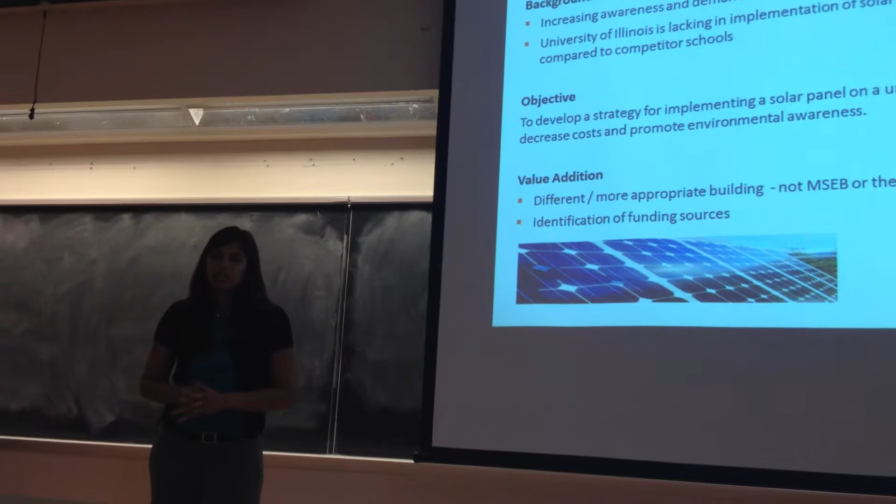So that brings us to the objective of our project, which is to design and develop a system, a solar panel for a university building to help decrease costs and, more importantly, to increase environmental awareness. This project has been repeated in past years. So in order to add value, we are choosing a more appropriate building for this year. In the past, there's MSEB that was done in the ARC, but this year we're doing a more appropriate building.

And also we're identifying funding sources because of the expense of solar panels. We're trying to make this an actual feasible project so we can submit a proposal to the university.

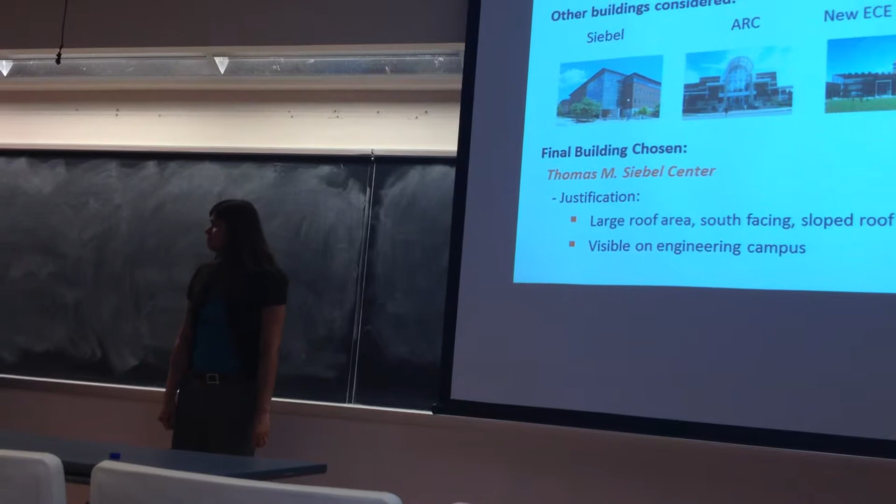I'll discuss the building analysis briefly. So the initial proposal was for us to investigate the MSEB, but in further review we decided that it was not one of the most appropriate buildings due to area constraints on the south roof. So we investigated the Siebel Center, the ARC, the new ECE building, which is currently being constructed, as well as the Speech and Hearing Science building.

Ultimately, we decided on the Siebel Center due to its large south-facing roof area that is also sloped at an appropriate angle for our latitude, so there's a maximum light absorption. And it's also visible on the engineering campus, which helps promote green energy.

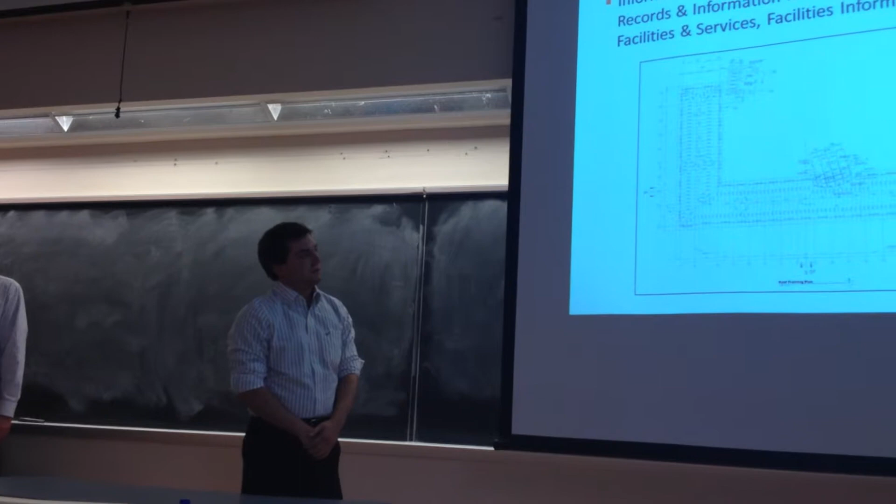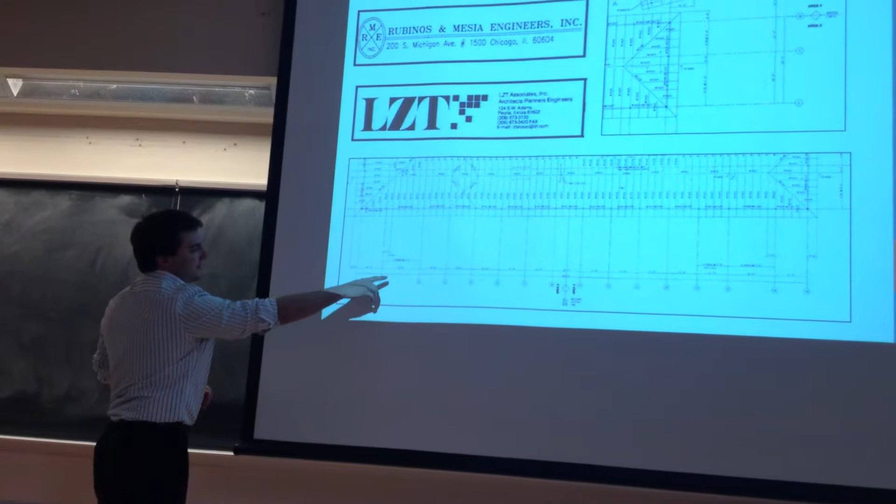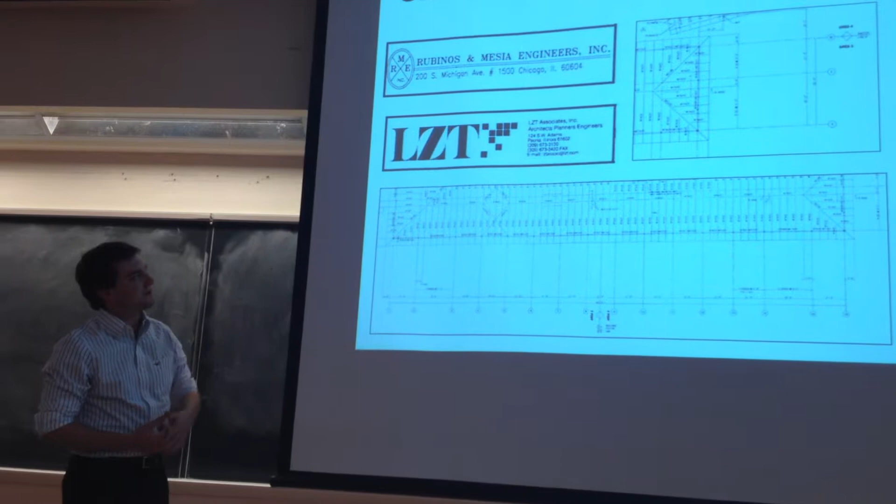As you can see here, this is an architectural drawing of the Siebel Center that we acquired courtesy of Beth Leitz at Facilities and Services. And zooming in closer on the next slide, you can see the very bottom of the south-facing roof, and there are distances and lengths that you can see there, as well as the far east side of the roof and the lengths there that were used to calculate. And these designs are courtesy of these architectural and engineering companies.

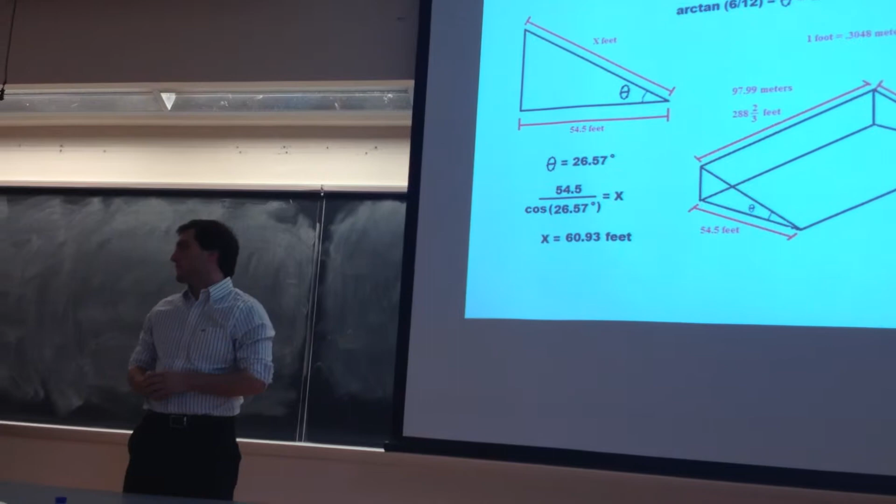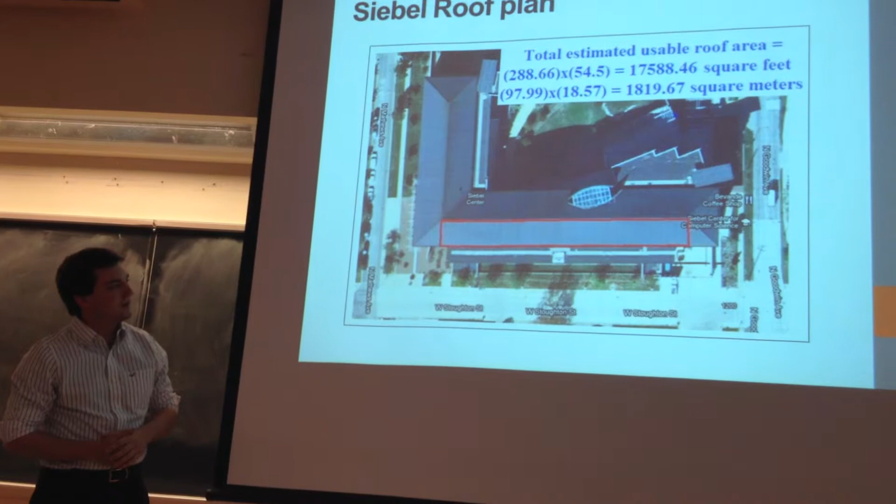And on the next slide, I've created a schematic that shows the slope of the roof, which ended up being 26.57 degrees. The length ended up being just under 98 meters, and the width was just over 18.5 meters. Using these lengths and widths, we were able to calculate a maximum possible roof area of just over 1,800 square meters. And as you can see on this Google image, this is the area of the Siebel Center roof, which we were planning on implementing the solar array.

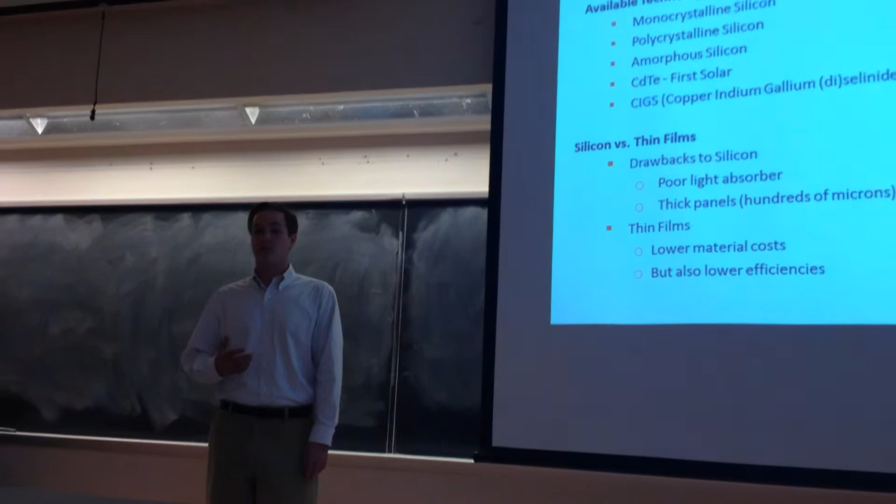So I'll be talking about the different solar technologies that we looked at for this project. So we looked at a few different technologies, silicon varieties, including monocrystalline silicon, polycrystalline, and amorphous, but also thin film varieties, including cadmium telluride, which is being developed primarily by First Solar, an American company, and also copper indium gallium diselenide.

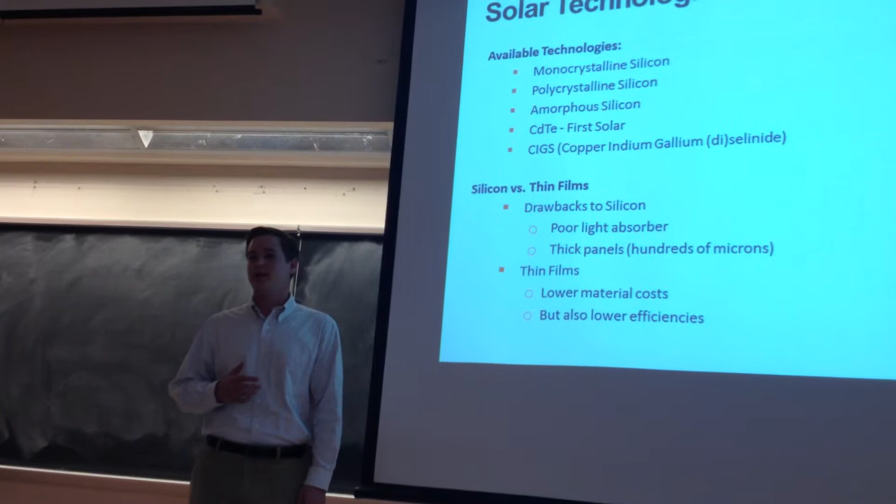So monocrystalline silicon is advantageous within the silicon varieties because it has fewer grain boundaries and is therefore more efficient. And also the electronics industry has a lot of experience with manufacturing this material because of its use in the electronics industry.

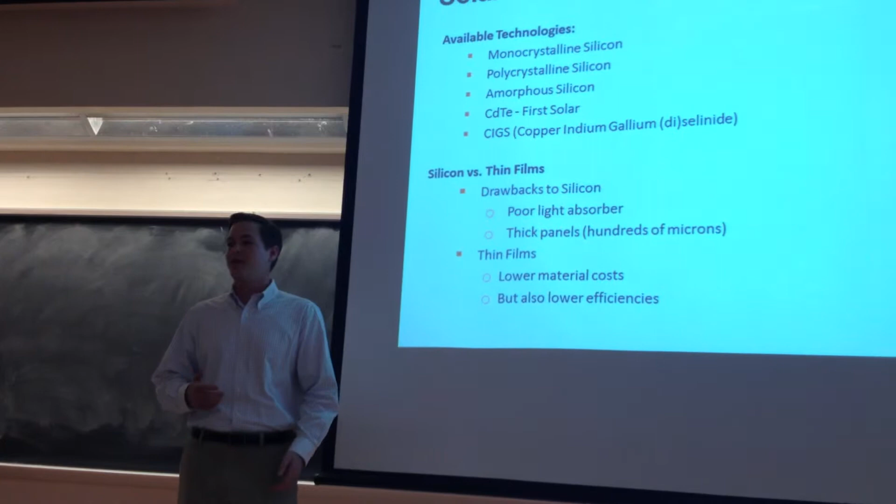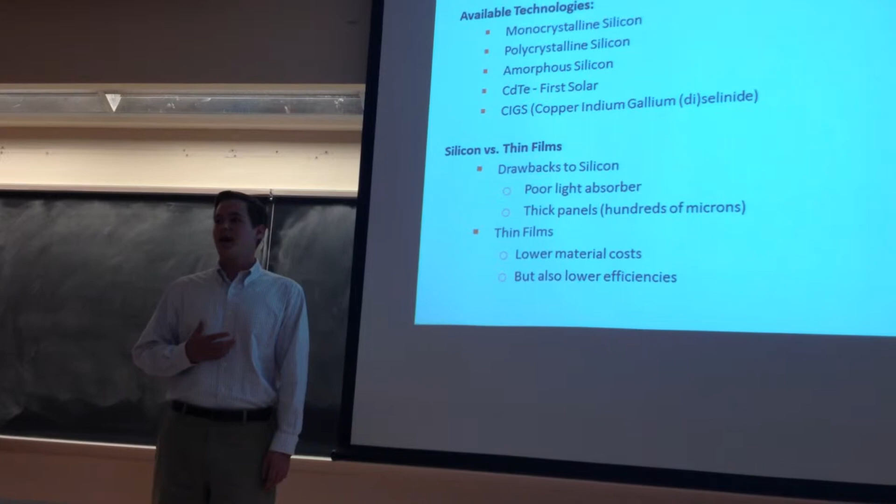Thin film solar panels have been developed primarily in the past 10 to 15 years in response to certain drawbacks with silicon. Silicon is a relatively poor absorber of light, and the panels made of silicon have to be very thick, hundreds of microns. Thin films have the promise of offering lower material costs because they're much thinner than the silicon panels. But the drawback of this is you get lower efficiencies. So this is the trade-off that researchers have been working with.

So there were a few different criteria that we examined for choosing a technology. We defined our value as being the total cost of the panel, which includes the modules themselves as well as installation costs, which are very significant. And we divided that by the first year output as a means of comparing between the different options.

We also wanted a warranty that was at least 25 years. This is a long-term project. That's a guarantee by the manufacturer that efficiencies won't drop by more than 20% over that period. And lastly, we wanted a technology that's been field tested for this period of time. As I mentioned, thin film technologies are newer, having been developed in the past 10 to 15 years, so we don't actually know how they hold up over a 25-year period.

And this is actually a risk outlined by First Solar in their annual 10K report. You can read the excerpt here, that they don't know how cadmium telluride actually holds up over 25 years because it's a newer technology. So I doubt that First Solar is losing sleep over this, but it's a risk that should be considered. And these drawbacks led us to look within the silicon technologies, and we ended up choosing monocrystalline silicon because it offered the best value.

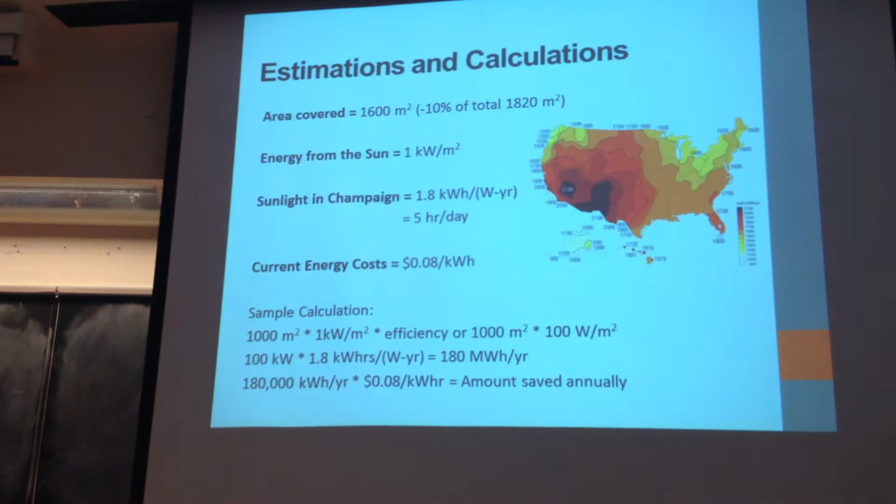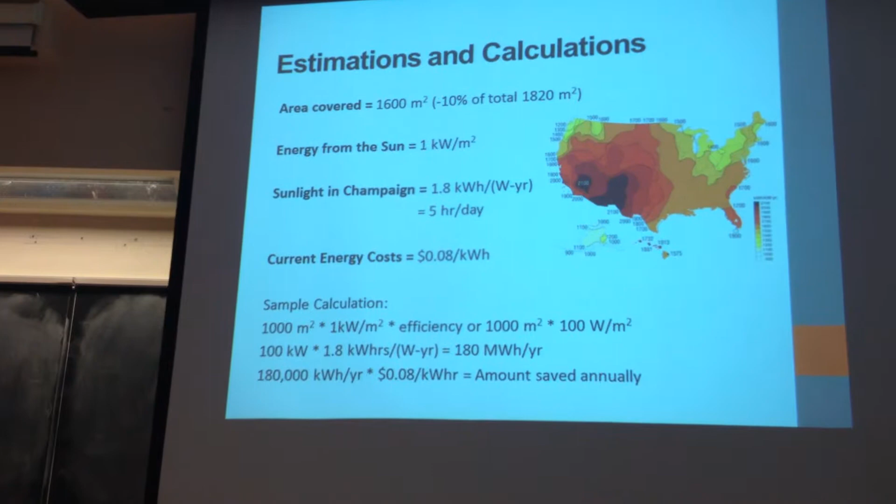And the figure on the right shows that Illinois is in the moderate range. And also, the current energy cost for Siebel is 8 cents per kilowatt-hour. It was 7 cents last year, but it has risen to 8 cents this year. And using those numbers, we can calculate how much we would save.

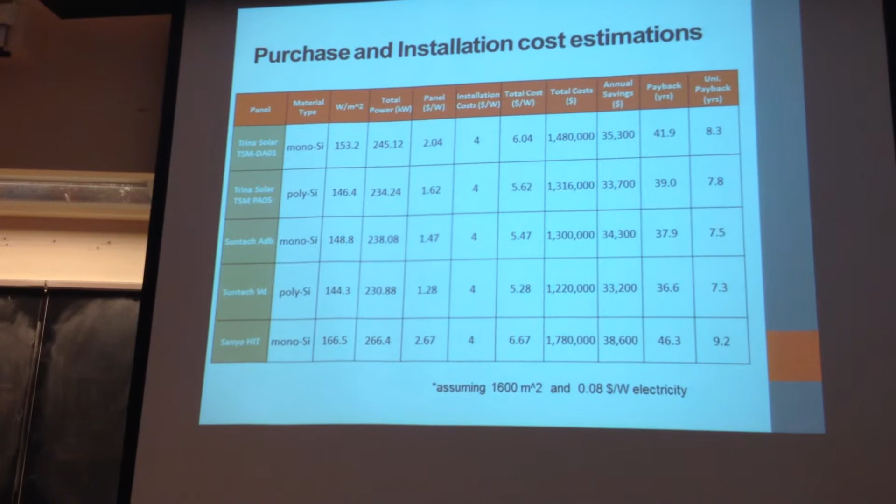So I took silicon panels from 3 different companies: Trina Solar and Suntech, which are Chinese companies, and also Sanyo. You can see the efficiency outlined in watts per meter squared, and they're all quite similar, with each company's monosilicon obviously slightly higher than the polycrystalline silicon. And this leads to a total power output of around a 250 kilowatt system.

And the installation cost is a big deal. We can't really say for sure what the installation cost would be, because the process would be going through Facilities and Services. So we talked with Professor Rockett, and he said that $4 per watt would be a pretty reasonable amount.

It could be as high as 5 or 6, but it could also be as low as like $2 per watt per kilo. So all in all, it comes out to be around $1.5 million roughly, with each panel saving around $30,000 to $35,000 a year, and a payback period ranging from around 35, 36 years all the way up to 46 for the Sanyo.

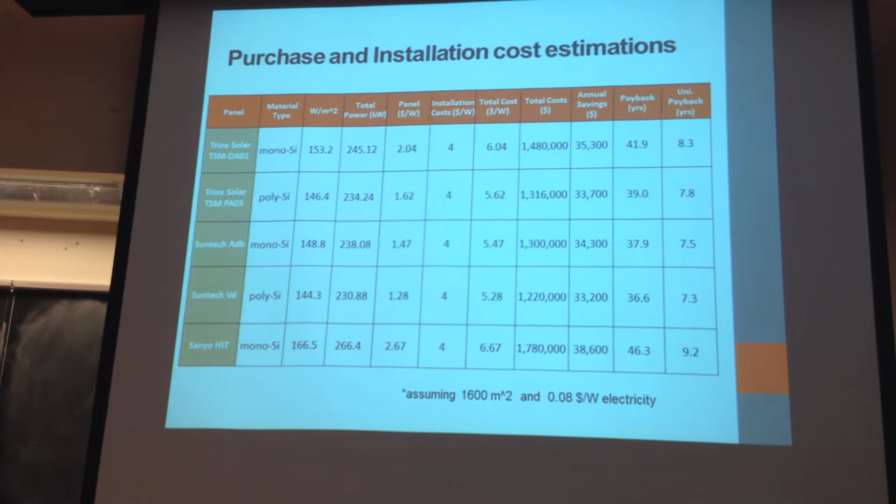However, with our funding strategy that Vijay will talk about later on, we might be able to get the university to pay only 20% of that total cost, which will lead to a shorter payback period. So within these, we recommend only the Sanyo, but in reality we wouldn't have a choice because we would be submitting the proposal, and the F&S people would actually be doing the bids, and they would be the ones selecting.

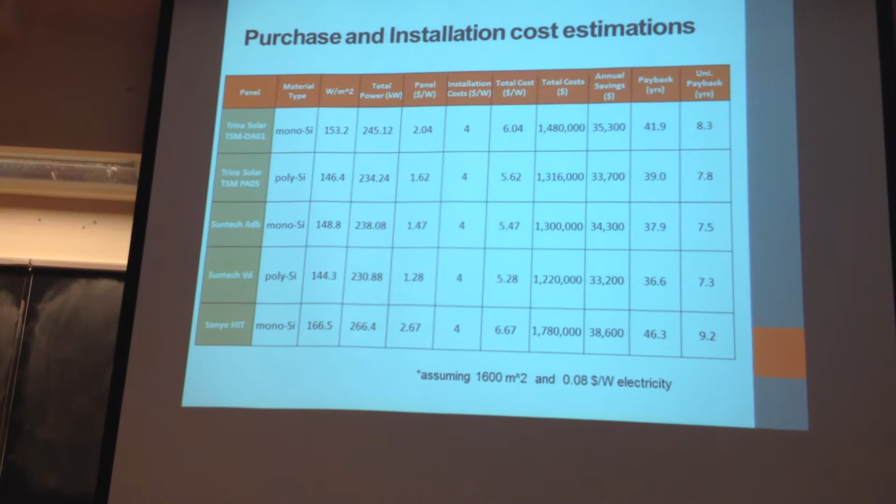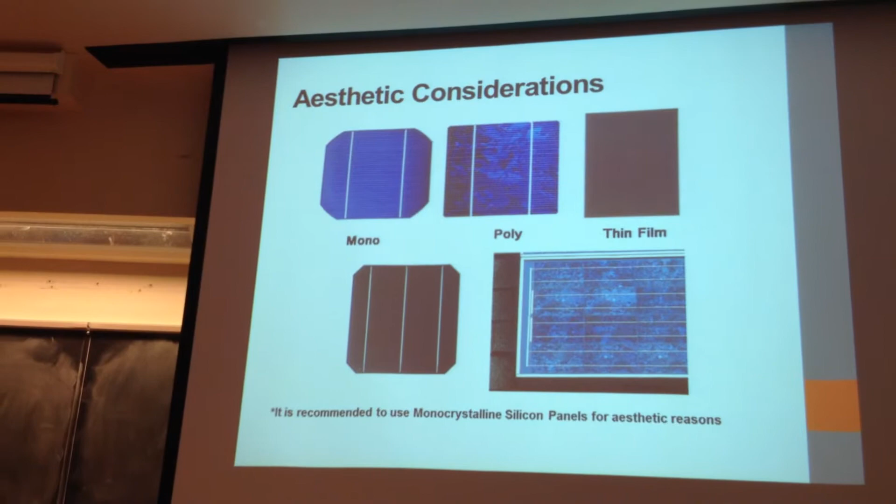But we would recommend the Sanyo because with the university payback period, there's very little difference between each technology, and after the payback, you would gain more with the Sanyo since it has the highest annual savings. We also took into consideration that with polycrystalline, each individual grain would reflect a different contrast and color, so it wouldn't be really nice on the roof of the Siebel Center. We've been told that aesthetics is a pretty big consideration, so it would narrow it down to monocrystalline silicon, which is a uniform color, either blue or black.

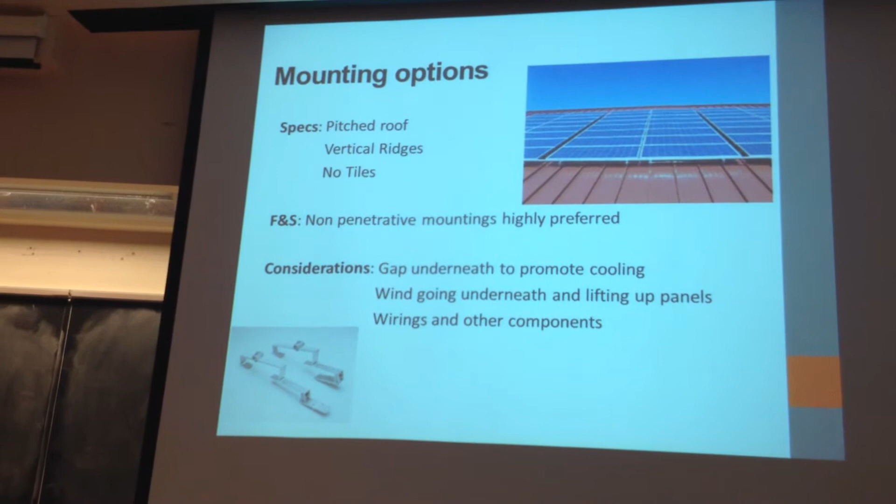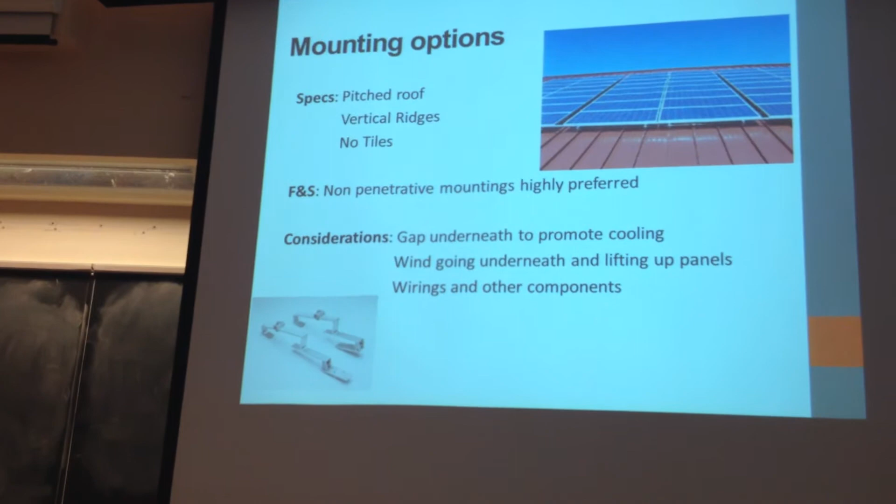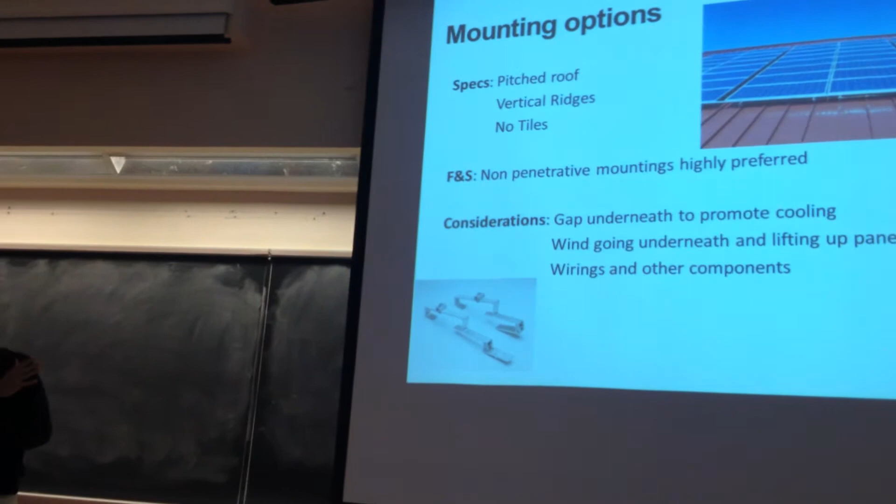So also for mounting options, F&S stated that they are very strict on penetrative mountings, and they want to minimize any penetrations on the roof because that could cause leaks or, worse, collapse of the roof possibly. So there are options for non-penetrative mountings, and an example is shown in the picture, where the Siebel roof actually has a very similar texture to this roof because it has a vertical ridge kind of thing. There are several ways to mount this, for example, hook it on the top of the roof and have supports all the way down.

But some considerations during mounting are that you need some amount of gap underneath to promote cooling, because solar panels have higher performance when it's cool. But you also don't want the wind going underneath and lifting up the panels, because panels are quite large and there could be a lot of load on them. You also have to consider the wiring and other components such as inverters, where you might place them underneath the roof, or wire them all the way down to the ground level. These are some components the installation people would have to take into consideration.

So we also looked into potential funding sources for this project. As I mentioned earlier, solar panels are very expensive, and in order for the university to actually install them, they would need us to find sources of funding. First, the Student Sustainability Committee, an organization/committee on campus that promotes environmental awareness and funds projects, so they were a key resource. The Illinois Clean Energy Foundation and the Illinois Department of Commerce and Economic Opportunity are both geared towards improving sustainability within the state, so they were also considered, and then university alumni, corporate sponsors, the U.S. Green Building Council, and any kind of federal grants and tax breaks.

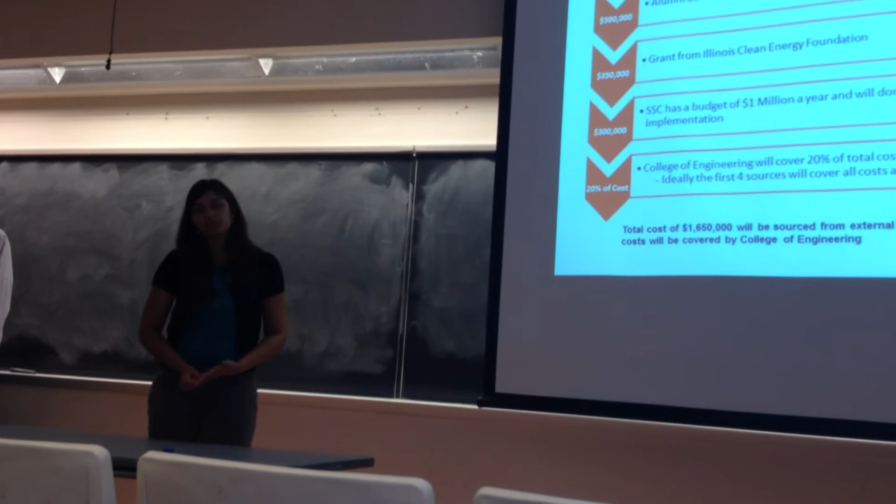Most of the solar panel costs that we projected were going to be solar panel purchase and installation. Costs were going to be around $1.5 million, so that should cover most of it. If any more money is needed, then the College of Engineering promised to fund at least 20% of the cost. But ideally, if we can cover it with external sources, then the university payback period would be zero years.

So I'll talk about some of the next steps of our project. Now that we have everything in place, including potential funding sources, we can go ahead and submit a brief report to the Student Sustainability Committee and Morgan Johnston at Facilities and Services. Like I said, the funding must be in place prior to submittal so that they take our proposal seriously. And the report also must be submitted by a manager of facilities at the Siebel Center so that there's a non-student name associated with the project that Facilities and Services can be in contact with.

After that, we will work with Facilities and Services to attain approval on certain details of the project. There are many considerations, like Pud said, non-penetrative mounting, so there are minimally invasive procedures on the buildings themselves. The issue with implementing a photovoltaic system on an existing building is the mounting, because they don't want to structurally compromise the building. There are also other budgetary considerations.

If the project is over certain budgetary levels, different bureaus must approve the project on campus, and different boards involving the chancellor and aesthetics, as Pud also mentioned, have to be taken into consideration and approved as well. After these things gain approval, Facilities and Services will send the project description to a variety of companies in a search for bidders. Once an adequate number of bidders are attained, Facilities and Services can go ahead and select the appropriate bidder.